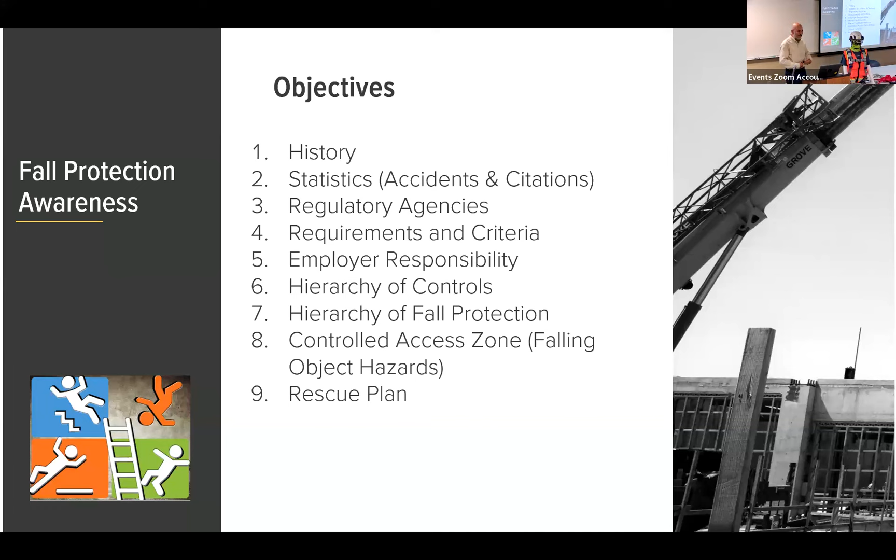If we happen to have concrete stakes sticking up or rebar, and you trip, probably you're not going to be injured because of the actual trip, but where are you going to be landing on? Those are things we have to consider, knowing that a third of all those fatalities are related to a fall. That really makes a difference.

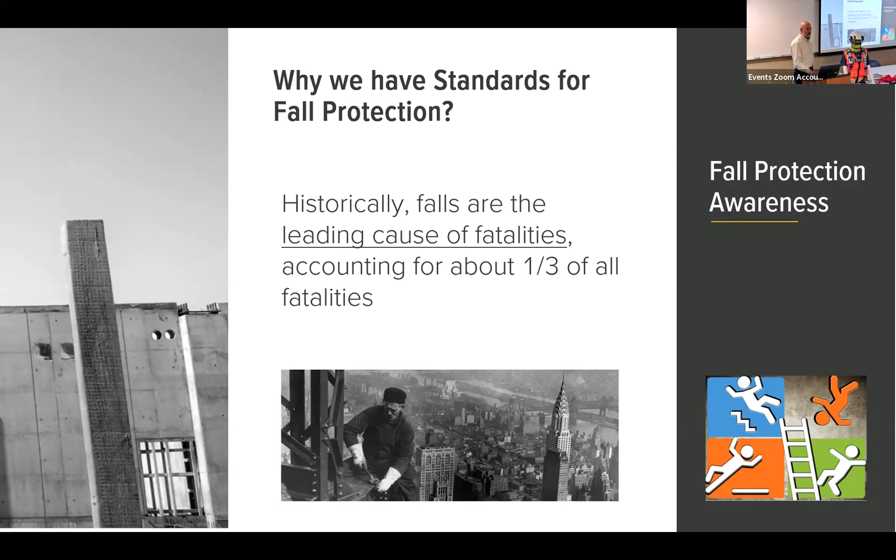These are some of the citations that have been given when it comes to fall protection. One reason we want to mention it is because as employers, we have to make sure we're covering all our bases, not only teaching our employees how not to get hurt, but also how not to be cited. We don't want to be cited.

This particular citation is on the construction industry. 3,704 citations have been given in the last year for fall protection issues related to fall protection. And when it comes to training, 1,132 citations were issued for not having training records on safety.

Anytime they come and do an inspection into a work site and see Pedro walking on the roof with no harness, they ask, let me see his training records. How does he know, how do you make sure he knows he needs to use a harness up there? We don't have training records. That's when we receive citations.

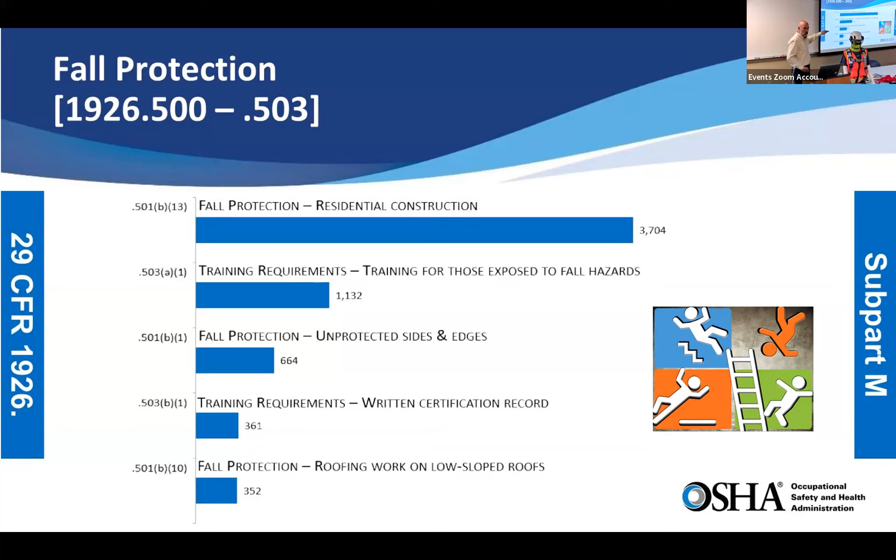Now, when we're talking about the whole industry, the fatality work injuries by event, on this graphic you will see the amount of fatalities we've experienced in the last year compared to 2017, 18, 19, 20, and 21. Most every year it's more than 1,000 deaths, fatalities related to work, but a third of those are fall related.

And you can see three different ones: total falls, slips and trips; falls to a lower level, meaning you were at height and fell to the lower level; and the other ones you can barely see at the bottom of the graphic in blue, those falls on the same level. But still, if you combine those three, it represents a third of all fatalities nationwide.

This is why we have to talk about fall protection, to bring awareness that we're not exempt. Accidents happen, and of course if it's an accident, we're not planning to have it. We don't wake up that morning thinking, I want to fall today. It will happen -- either because we're not paying attention, because we feel complacent, because we've been doing this too long, or because we're not aware this is dangerous, that you can fall. You haven't received any training.

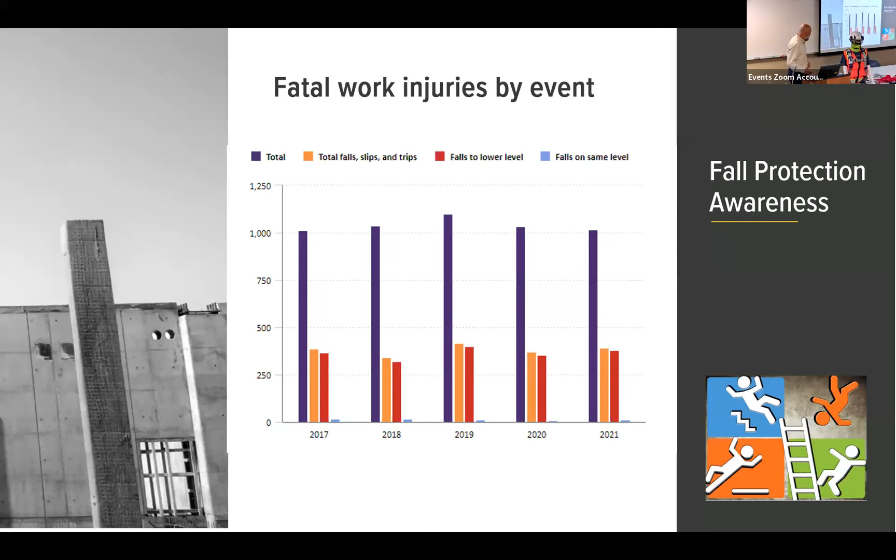Now this is more local, from Utah, UOSH. They give us accidents by event in 2022, and we can see highlighted the ones related to falls. From an elevation, we ended up having a total of 90. This is in the state of Utah only.

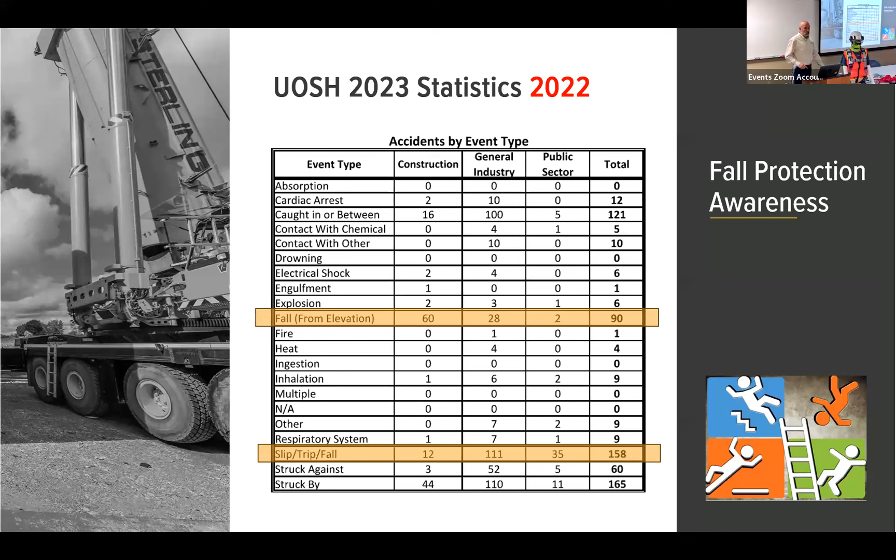And slips, trips, and falls, 158. If you combine these two, it's over 230 easily. That's why it represents a third of all the accidents that we have. Now, this is 2022 -- what about 2023?

This was released a couple months ago from UOSH. From an elevation, 45 so far, released back in May. We haven't updated these numbers, but slips, trips, and falls, 104 already.

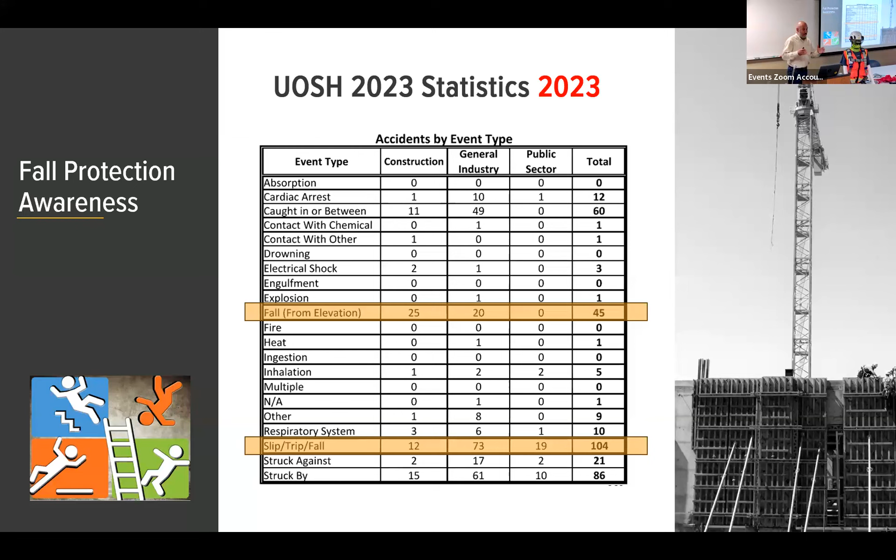And so now that we know that we can be cited, that we can have fatalities, and that is also happening in the state of Utah, do we want to address this?

There's too many regulatory agencies. It could be federal, it could be private. We have MSHA, we have OSHA. We also have counties issuing regulations. Sometimes we come to a client and the client says, well, hold on, in my job site this is how we address fall protection. Or it could be the employer who says, nope, I don't know where you have been working, but this is not how we do it here. This is how we do it.

So those regulatory agencies set different rules and regulations when it comes to fall protection. We just have to be aware of what the rules are, I'm going to be working with you, my employer, on this particular project with this client, in this city, under this regulatory agency, OSHA or MSHA. Once we know what the rules are, we want to meet the most strict one, and we can meet all the rest of the regulatory agencies.

So we can also have manufacturer regulations. And I'll give you an example. If you're using a boom lift, MEWP, mobile elevating work platform, there are some manufacturers that say, oh, you don't have to tie off in a scissor lift. But then you come and work for a client in Southern Utah that says, nope, if you bring a scissor lift on site, you need to tie it off. Two different regulations, so you have to pay attention.

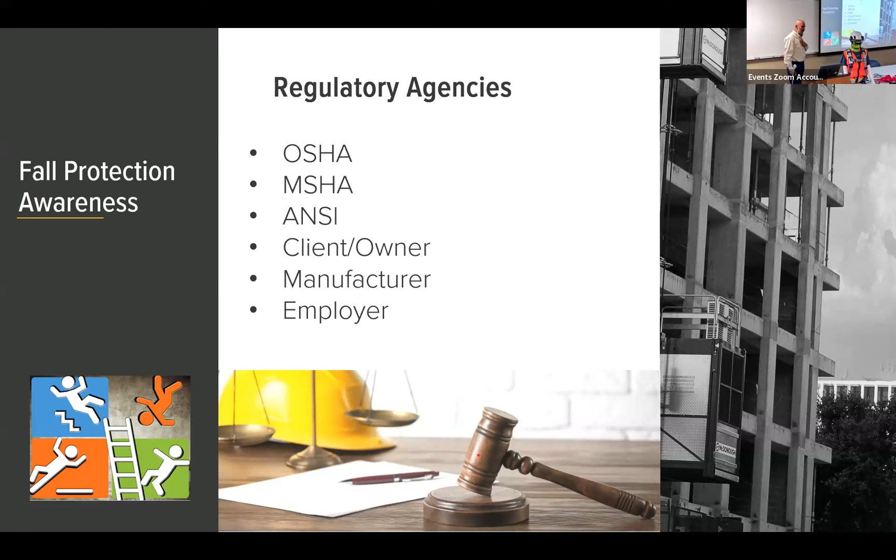Is this a rule from OSHA, MSHA, the client, the owner, my employer? And then decide, what are you going to do?

Now, what is the criteria? How do we know when we have to protect our employees? Anytime they're working 6 feet above the lower level, if they're exposed to a fall of 6 feet or more, they have to be protected. But not only for people falling, also from objects falling and striking an employee down below, falling objects, or tripping over.

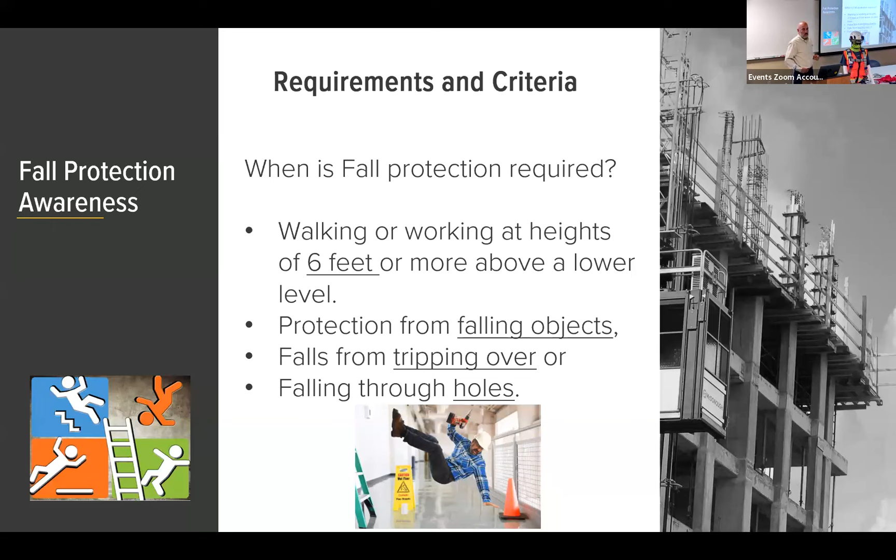Do we have a mess? Do we have cords and materials and tools all over the ground, and people are going to be tripping and falling? And also, do we have holes, shafts, places where people can fall through and go through to the next level? So anytime we have one of those four items, 6 feet or more, holes, tripping hazards, and falling objects, we have to protect our employees from getting struck or from falling.

Okay, now what are the responsibilities? As an employer, we have to assess and determine how I'm exposing my employee. What do I need to do to protect him? If they're going to be working on a roof, are they going to be working on a balcony? Are they going to be working on a scaffold? Once the employer assesses, that's his responsibility to determine what's the risk.

I have to determine what controls are available for my people. That's my responsibility to protect my guys. And not only once I select, I also need to provide any equipment that they might be needing to get protected. If it's handrails, handrails. If it's harnesses, I need to provide those to them so they can be protected from those holes, those elevations, and also protecting those working below so nothing is going to be dropping and striking them.

And training. Training is crucial, is vital. Bringing awareness and giving them the knowledge will allow them to identify hazards in the future.

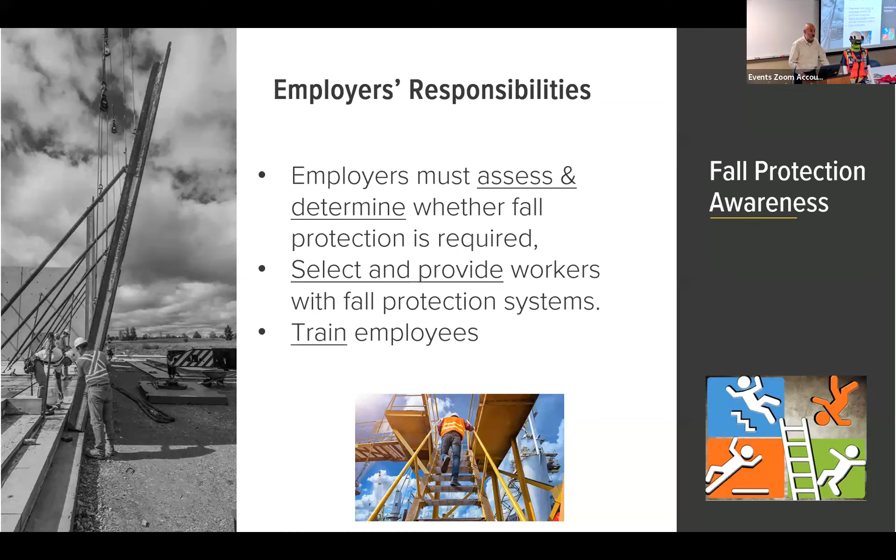We can always eliminate. If we're talking about painters using a petroleum-based paint, is there the possibility to get a water-based paint instead? That way we eliminate the fumes and flammability without relying on a respirator. So elimination is number one - we have to look at ways of controlling the hazard that eliminate it altogether.

Substitution, similar to the paint example - I have two or three different paints. What can I substitute to eliminate the hazard and bring in only the less harmful option?

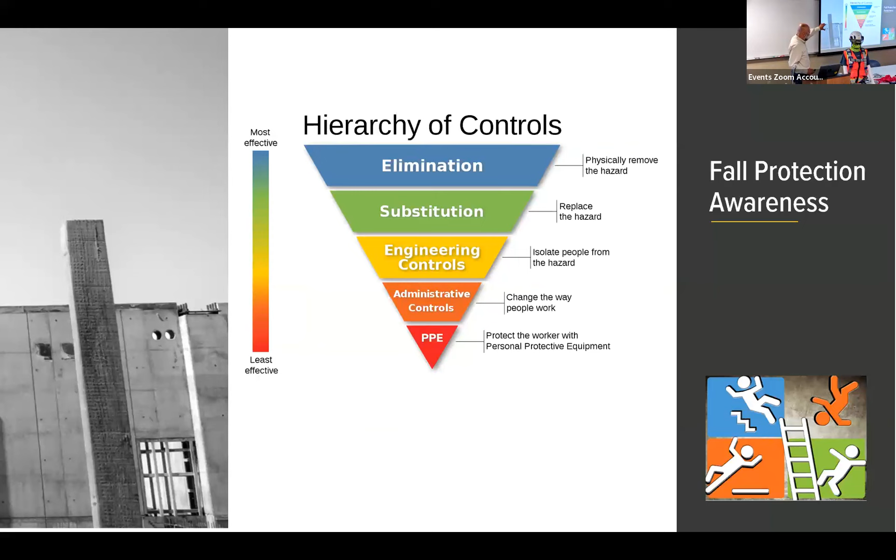Understanding this hierarchy of controls, there is another one - the hierarchy of fall protection. Same as the hierarchy of controls, where we look to eliminate, substitute, and use engineering controls. Number one is hazard elimination - do we have the ability to work from ground level and do the work without exposing ourselves to a fall? That means using extensions for tools so I can do all the work from the ground - I don't have to climb a ladder or go up into the scaffold.

Or better yet, can I bring the work down and assemble it at ground level? If it's possible, we are eliminating the hazard entirely - we don't have it, period. Can the work be done on the ground? That's number one, hazard elimination.

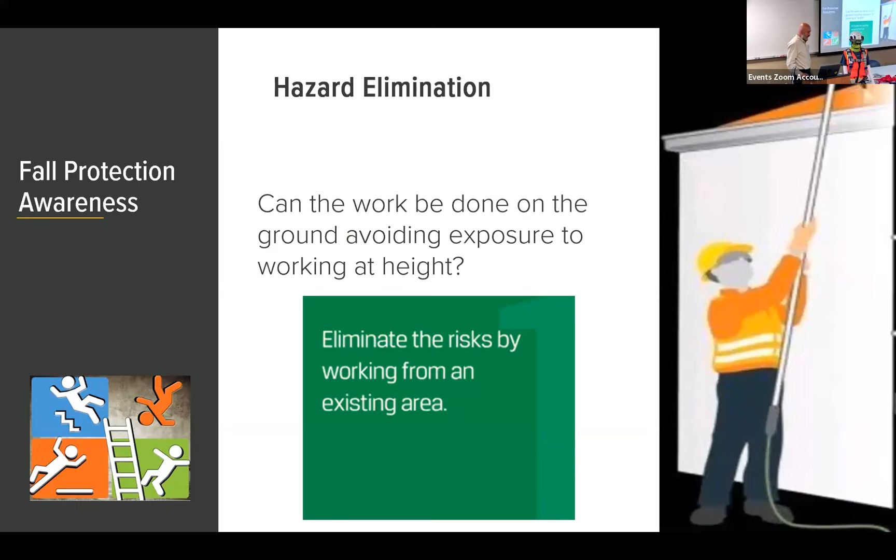Number two will be the passive measures we can use, like guardrails - anytime we're exposing an area, we can set items around to impede and prevent anyone from falling. That's passive fall protection.

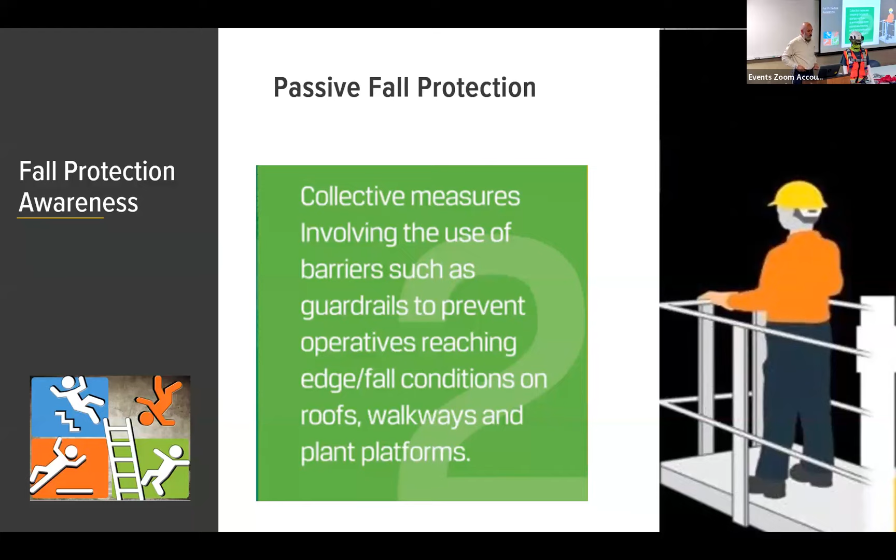Now moving to fall restraint - sometimes people confuse fall restraint and fall arrest, but they're two different things. Fall restraint has a certain length that prevents you from getting close to the edge and falling, so the restraint prevents you from falling. The fall arrest system stops you from hitting the ground once you fall.

When workers, employees, and coworkers understand the difference, obviously nobody wants to fall - everyone wants to prevent a fall. So are they choosing to use fall restraint or fall arrest? What do you want to use? How do we want to protect our people?

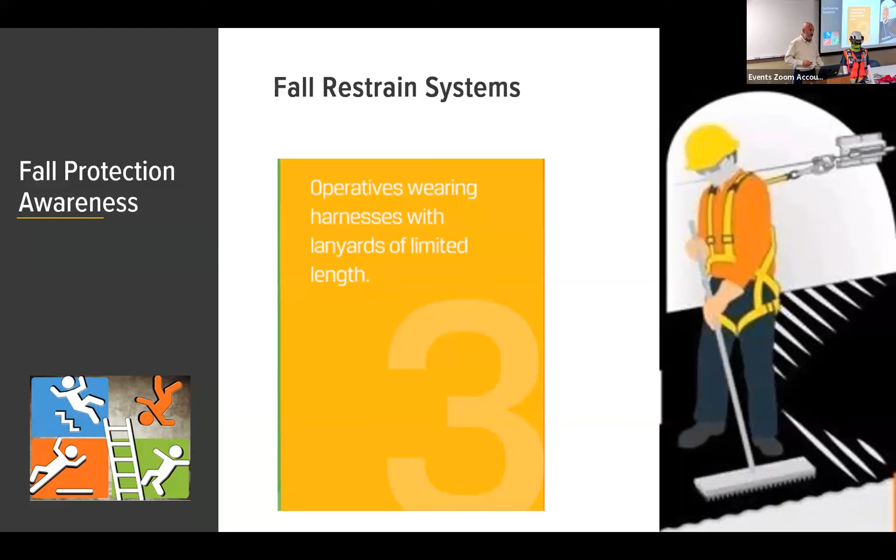The next one is the fall arrest system I was talking about - a regular lanyard, similar to this, gives you a fixed length and allows the employee certain movement, because it has a length that lets them move around and do the work, but if they fall, they'll be caught by this equipment - versus the fall restraint.

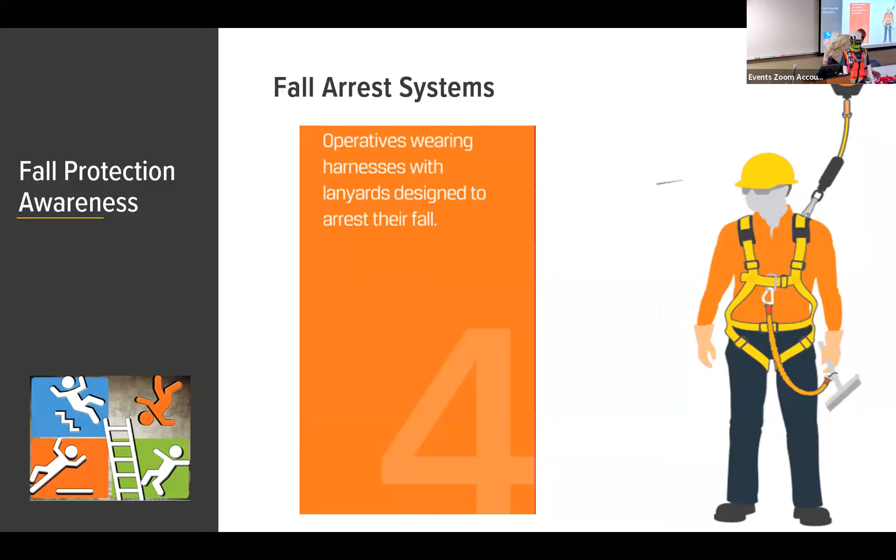We also have positioning devices that allow people to secure themselves to the work, freeing their hands to do the job, while the system sustains and positions them where they need to be. That's the fall arrest system.

Now, if we move to the next one, the administrative controls - those are the signs, the barricades, things that are visual for the people, but in reality they're not going to stop you from falling or give you the restriction you need to stop.

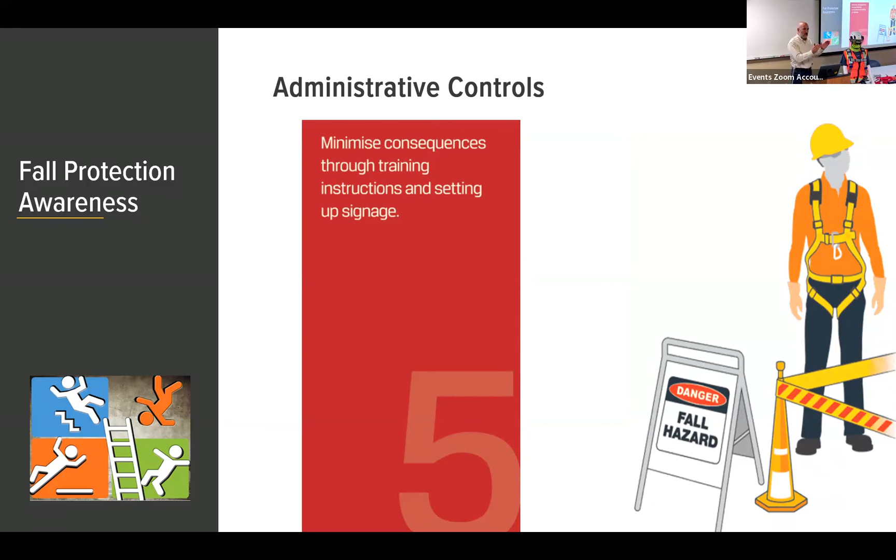When we apply this hierarchy of fall protection, it's easier to gradually think about eliminating. If we go to this graphic, eliminating the hazard, or using the passive fall protection, handrails, or fall restraints that will prevent you, allowing you to fall. But then we move to the fall arrest, which is going to catch you after a fall.

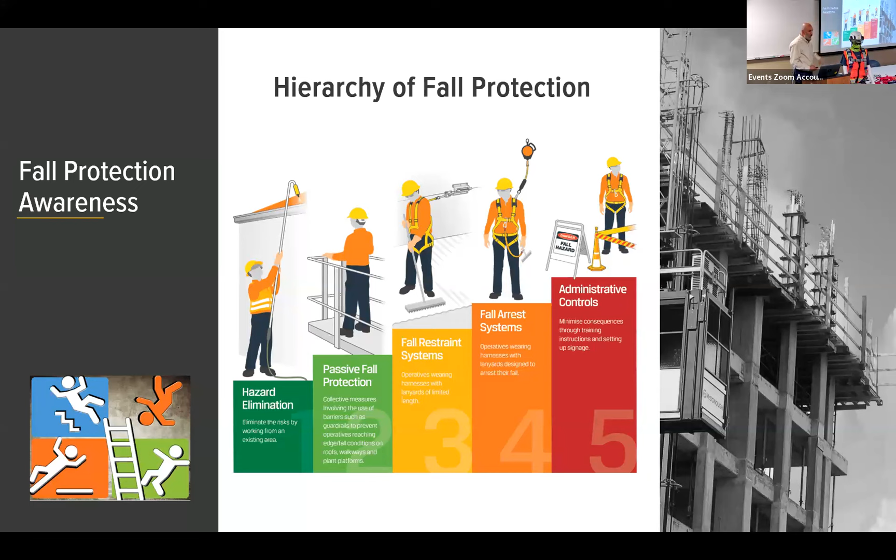And then we have administrative controls. Now, what are the items that we need to include on the training? We want to teach our guys to identify hazards. We're going to teach them all the different scenarios where they're going to be encountering, depending on the work activities that they're going to be doing. And what are the most common hazards that they're going to be facing?

Once they recognize the hazard, then they will have the option to select the equipment that they're going to be using. Do they need fall restraint or fall arrest? Do we have available guardrails, hole covers? So they need to select first the items that they're going to be using, the equipment that they're going to be using, then inspect.

That's what we call the 5 steps of safety. Select the fall protection, inspect the fall protection. Then we're going to set up the fall protection, meaning how I'm going to put it on, how I'm going to be adjusting, how tight, how loose I'm going to wear it. And once I put all the straps and all the belts, it comes to the next one, the usage.

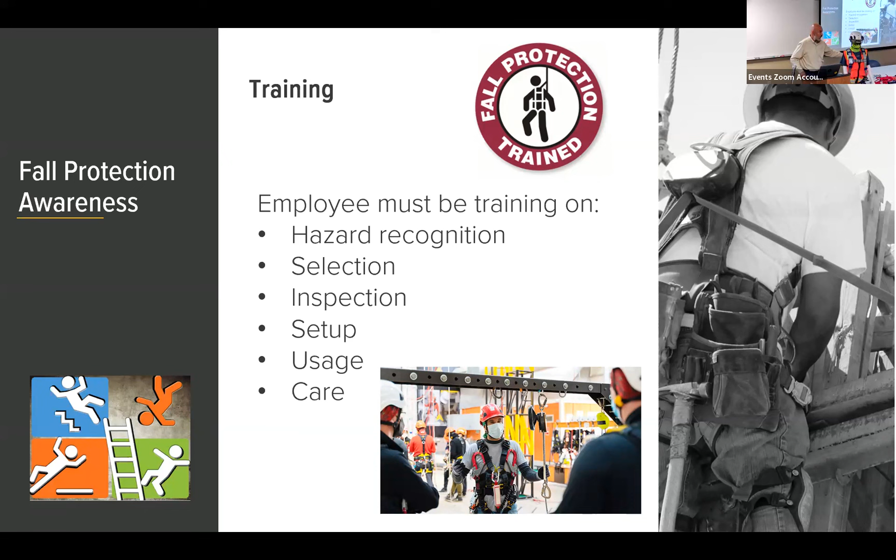Now, the conventional fall protection that we use in the industry, the first one will be guardrails. You set up a guardrail and nobody's going to be falling unless they climb the guardrail, right? But they're going to be protected. As long as they remain behind the guardrail, they are protected.

Now, if guardrail is not feasible, we can also use netting systems. But remember, guardrail will prevent you from falling. Nets will catch you after a fall. Two different things. Then we also have the fall arrest system, personal fall arrest system, that consists of 3 different items. It will be the full harness that they have to wear properly in order to work correctly.

And they also have a connector. The connector goes from the anchor point to the harness, and that's why we call it connector. There's too many different kinds. We have fixed length connectors, we have retractable connectors, and we have nylon retractable connectors, or we have cable retractable connectors that are good for leading edges.

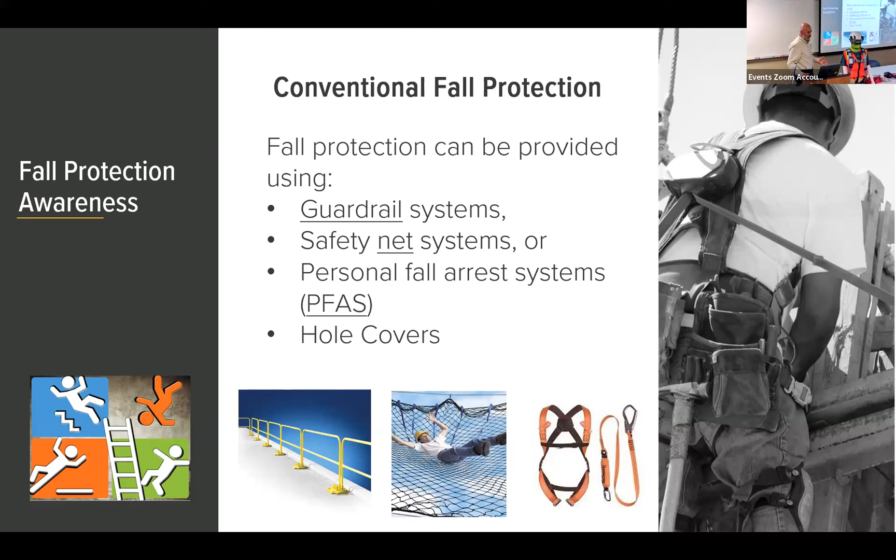Now, when it comes to guardrails, there's certain regulations that we have to comply with. If it's a pre-manufactured handrail, easy, they already come with the right measurements, we don't have to worry about it. But if it's something that we're gonna put together on the job site, we have to be aware that there's regulations about the height, the parts, the elements that have to constitute a proper handrail.

We have 4 elements: we have the stanchions or post, the top rail, mid rail, and toe board.

Regulation says that the top rail has to be between 39 and 45 inches. Most people put it at 42 because it's right in the middle and it will meet both requirements, but they give you that discrepancy, put it lower all the way to 39 or 45, because we have different sizes of people, some taller and some shorter individuals. So we need to determine where the top rail needs to be at. If you put it at 39 with a guy who's 7 feet tall, the top rail will be below his waist, and he will be exposed to a fall.

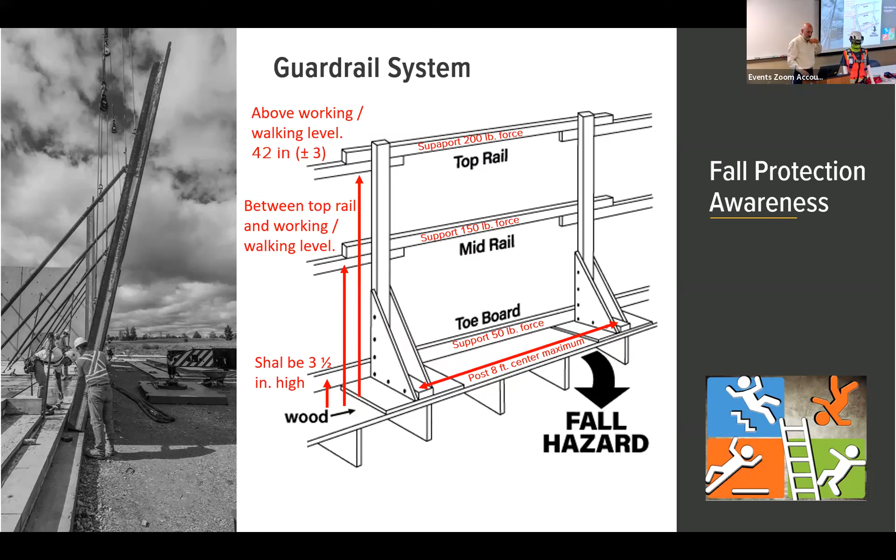Okay, that's for guardrails. Now, when it comes to netting, we have many different rules. I'm not going to mention all of them, but it has to be clear enough and set to prevent that if an employee falls in the net, it's going to be flexible and stretching, so we prevent that employee from hitting or contacting anything below. The net has to be 25 feet or higher below the workplace, and depending on the net, the opening can't be more or bigger than 6 inches.

And not every net works for fall protection. It might be possible that the netting system that the circus uses is not the most optimal for fall protection. We have to be aware that if you're going to use it for fall protection, it needs to come with a test from the manufacturer saying it's for fall protection and has been tested to support this force. Why? Because distance and weight will increase the velocity of impact. So that net has to come with a tag saying it's for fall protection and what maximum weight it will support.

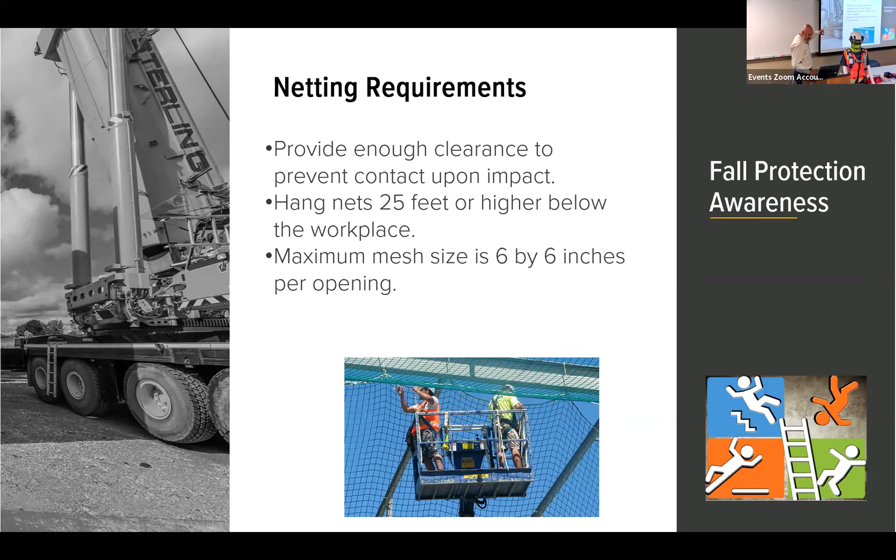It has to come with the tag, the label, but also the manufacturer has to test it to withstand a minimum of 17,500 pounds of impact resistance. And it has to be tagged, it has to say that. And if you can't read it, you shouldn't be using it.

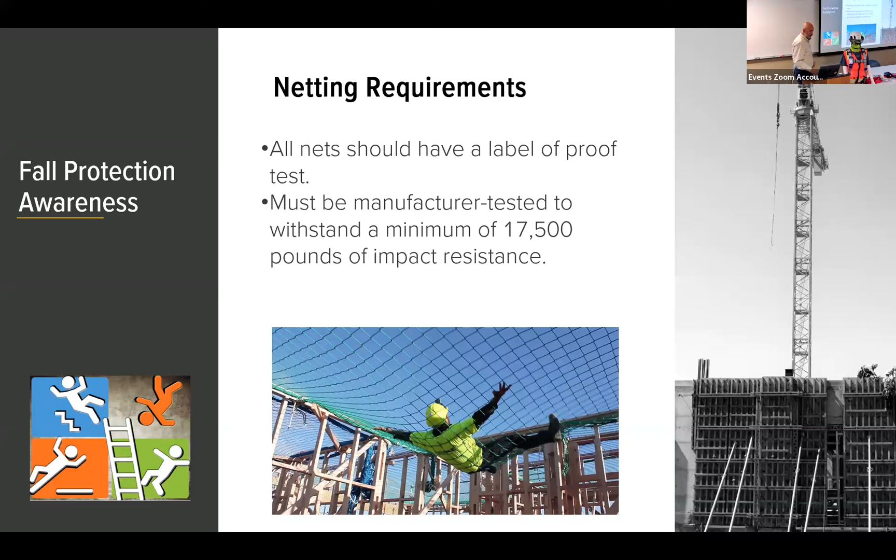Okay, so guardrails, netting. Now, personal fall arrest, I already covered that, consists of a harness, the connector, and there's many different connectors and positioning devices that we have to know how to protect ourselves. If we're going to be teaching an employee, we have to make sure that he understands their options and how to put them on.

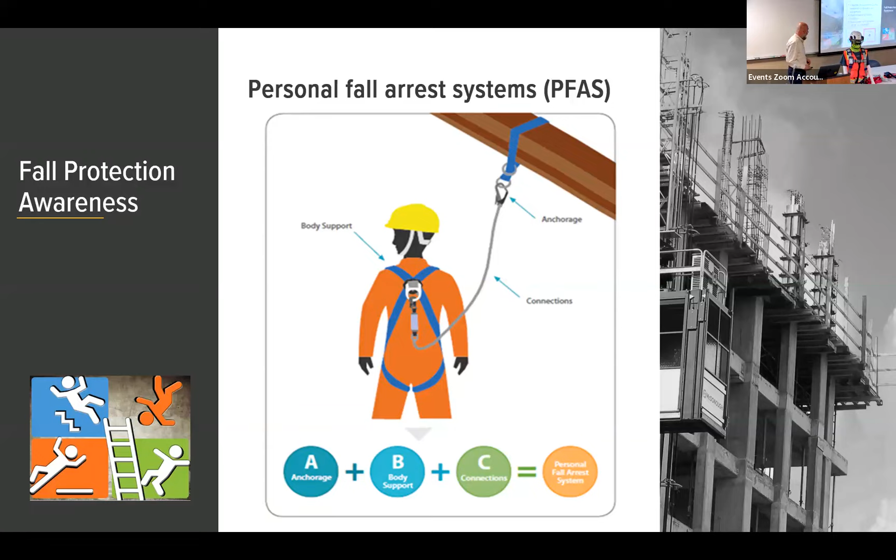Okay, hole covers. Do we want to protect our people from falling through a hole? When we are building or putting together a building, and now they come with elevator shafts, ventilation shafts, or electrical shafts, two hazards. If it's big enough, they can step into the hole and fall all the way through the next level, or they can kick something, a piece of debris, a tool that might be falling through the hole and striking another employee below.

So when we are looking at hole covers, we have to make sure that they support 2 times the weight of the employees and the equipment intended to be put on. If it's going to be a regular floor, they have to support at least 2 times the weight intended. If we're going to be having only employees, we need to calculate how many employees will be stepping on it, so it's strong enough to hold 2 times that weight.

Also, it must be secure. Why? Because there's a lot of traffic. People will be passing by, walking, accidentally kicking them, and they can move it out of place, exposing the hole again. So they have to be secure in place. There's different types. There's ones that you can purchase in different sizes, and they come with all the devices underneath to secure the hole cover, or you can make them yourself with a piece of plywood, as long as it's strong enough to hold twice the weight intended, and that you can secure it.

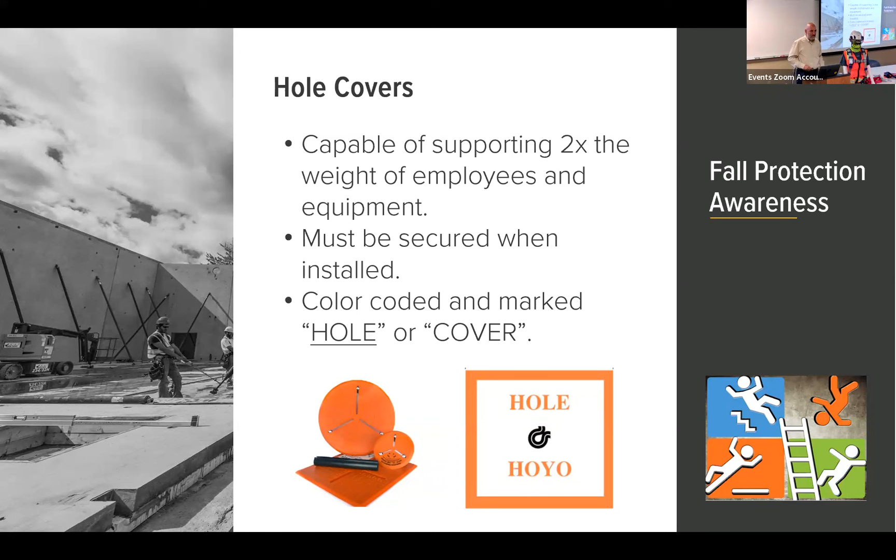Okay. Another thing that we can do is control the access. If I'm going to have 10 guys working on this scaffold, do I want people working below the scaffold with the risk of dropping materials or tools? Do I want to barricade the area to prevent anyone from walking under or working underneath? So when we're using these tapes, we have to make sure that we also use signs. Who owns it? What's the hazard? How can I get a hold of you if I need to enter into your work area?

And we might be putting up guardrails or simple tape. But if we're going to be putting tape, we have to have signs to indicate what's the hazard, how to contact me, and indicate what the problem is. Okay.

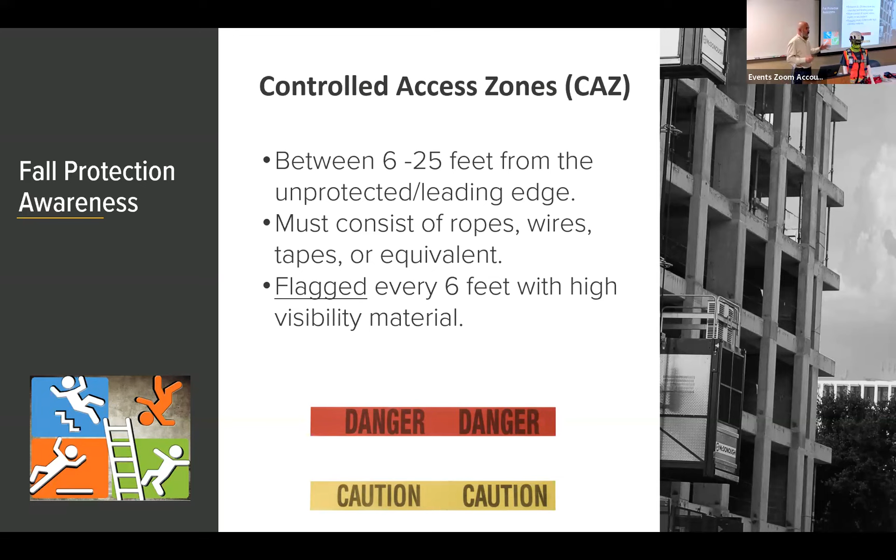And also, part of the controls for the access zone is putting up nets. If I'm going to be working on a working platform up there and I have the risk of dropping materials or tools, we can set a net inside the working platform and nothing is going to happen. Nothing is going to fall, like a piece of plywood.

None of my materials, none of my tools are going to be falling, or I don't have that flexibility. I can wear some of those tools, restraints that I can attach to my belt. And if I accidentally drop it, it's not going to go all the way down because it's going to be restrained inside my working platform. So that gives us how to secure tools and materials inside the working area.

And we prevent an employee or another person passing by. Sometimes pedestrians aren't really involved in the work that we're doing, and we have to protect them from falling objects, could be debris, materials, tools. Are we using nets, or are we using tools to secure belts to secure the tools?

Now, anytime we are exposing an employee to a fall, we also need to have a fall rescue plan. Why? It's the guidance, all the instructions people are going to receive to know that if anything goes wrong, what are we going to do? Who is in charge? How are we going to get Roberto down? How is Pedro coming down if he happened to fall and he's hanging in his harness? Do we have the equipment to rescue him? How fast do we need to rescue him? What is the risk of not rescuing him fast enough?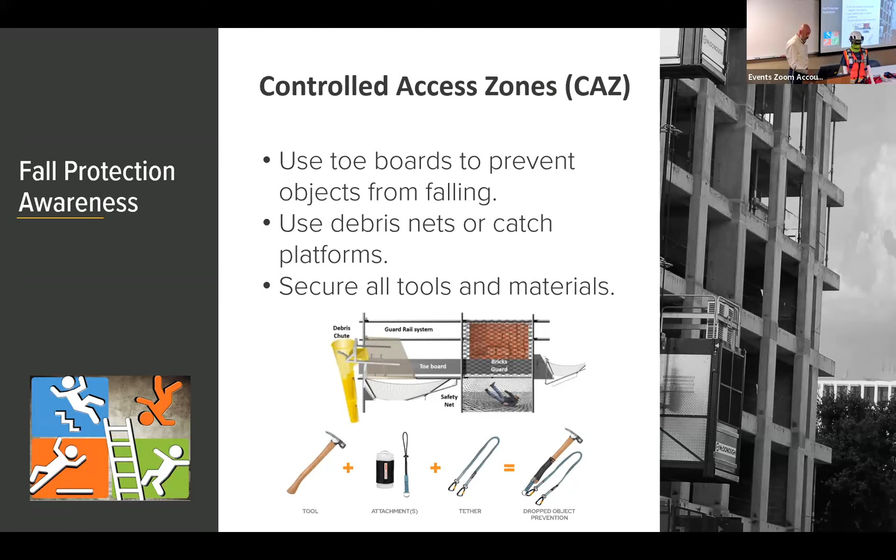And that guidance is going to give you all the details, and it has to be job site specific. Are you working inside or outside? Heights on the 5th floor or just a regular roof? Residential? How are we going to get that employee down if he fell? It's required. It has to be specific for the job site we are working on. So we have to have it in place, and we have to work on that rescue plan to make sure that we have it.

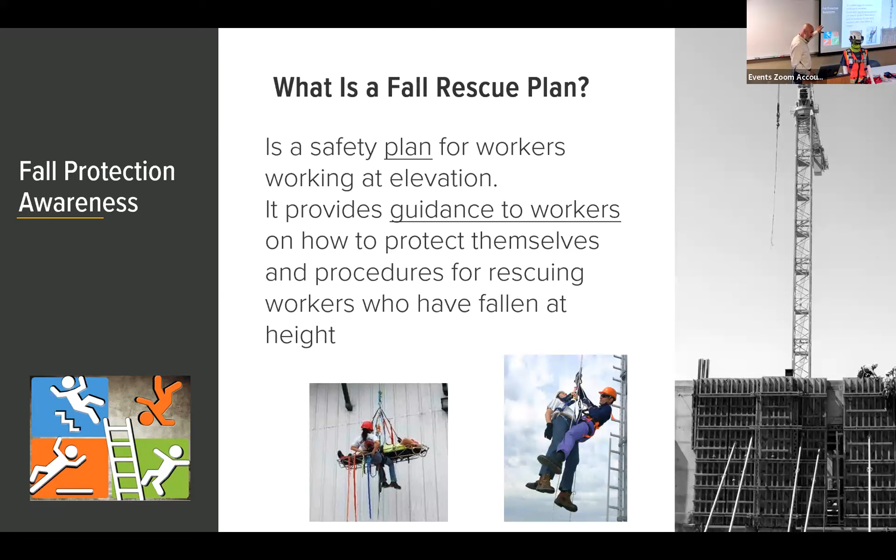We discuss it with the employees, but also because it's a requirement, it has to be site specific. Regardless if you're working on the roof of a residential project, or inside a manufacturing facility, or in construction building a high rise, we have to have a rescue plan.

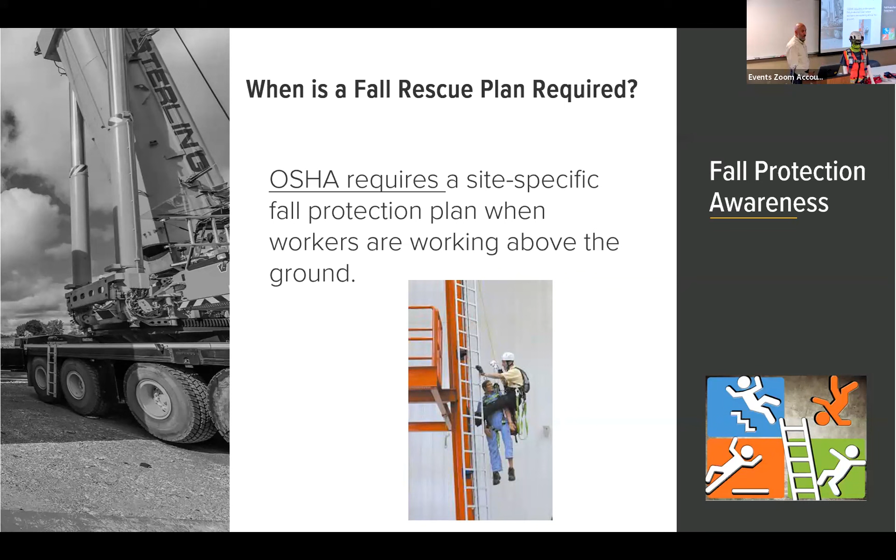Do we have questions? Comments? Yes. Okay, so you mentioned that there are standards on the net, and that if you don't get that little label on it, don't use the net. What about the other equipment, like the harness and stuff? Are there ones that have been tested, or are there counterfeit ones out there, and how do you tell?

Most of the manufacturers will give you labels, and labels will tell you who put it together, the capacities, sizes, and also at the very end, it comes with instructions on how to determine when it needs to be taken out of service. And also it gives you an inspection tag.

These have to be inspected by a competent person annually and by the user prior to use. So these tags will give you information on if it's legit, because it comes with a special tag that you can check, if you're technical, with a gun that will read all the information from it. But if you don't have that technology, you can grab all the numbers and research them.

This particular harness is a DBI Sala, a 3M device. This company is well known in the industry to produce a lot of the safety items for workers. So DBI Sala, trustable. But if I come across other brands that I'm not aware of, and if I'm in charge of buying all this equipment for my guys, I will do some research to see if it's a legit company and if they are certified.